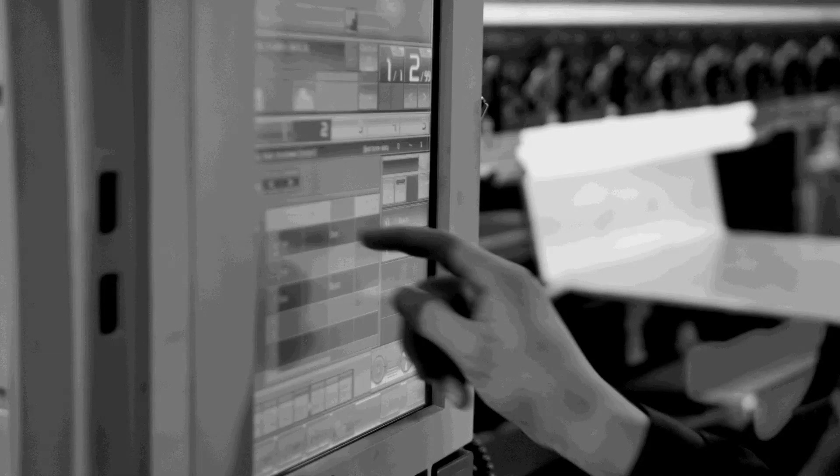The idea of this technical corner is to talk about Vericut. Now there's a system within Vericut called Reports. Could you walk us through what this actually does and how it helps engineers that use Vericut, Scott?

Sure. When the program leaves the CAD/CAM office, the operator needs to set the machine. They need information on this, and this needs to be in digital format these days. It needs to be traceable, and it's not just a list of tools. They may need to take dimensions off the part to set the stock in the vise sufficiently, or the clamps on the table. All these tools reside within Vericut to be able to do this.

If it's okay, I'm just going to start simulating through and we can get an idea and flavour of what I'm about to do.

While you do that, just to let you know this is a simulation, using a Makino machine, but it's not necessarily just about one Makino machine, is it? Completely neutral, the machine's really irrelevant. It's about what the information we're capturing from the simulation.

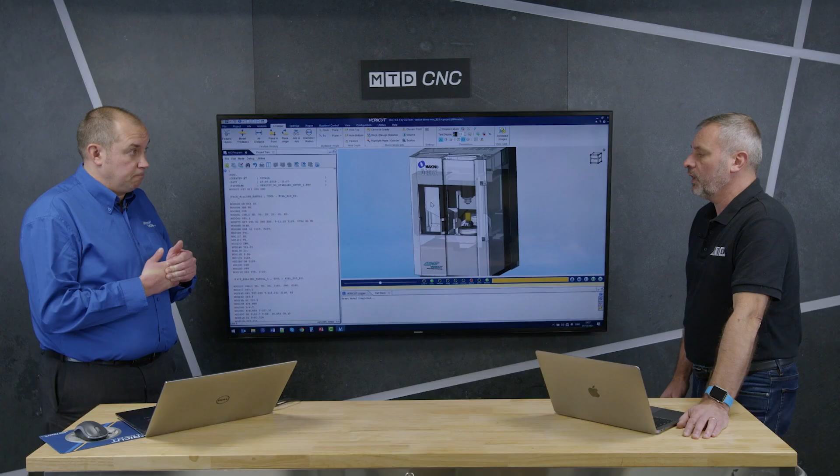Okay, Scott. So what you're going to see is I would just push play as I normally would do in Vericut. You're going to see what I've done there is taken a snapshot of the first setup. So it says setup 1 on the top right hand corner, and this is going to be embedded into our setup sheet or Vericut report.

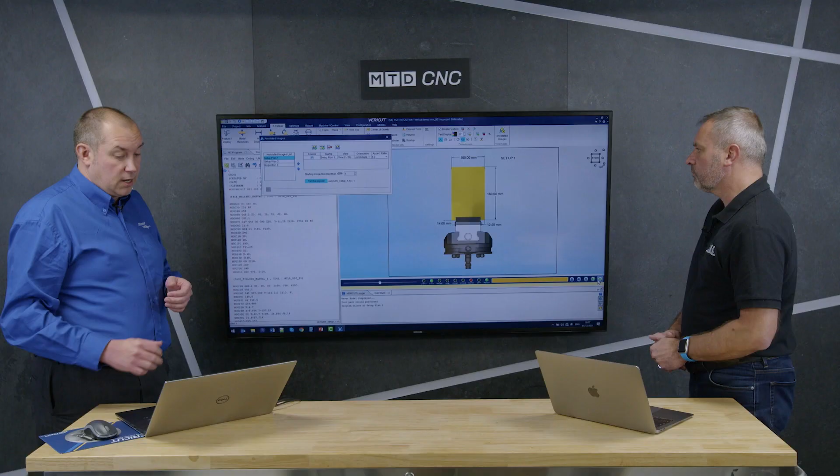Okay, so I'm just going to move through and we're going to simulate through. Now as I do this, I'm just going to talk about the benefits slightly. What we see with our prospects, and indeed some of our existing customers still, is that they're spending far too much time outside of the CAD/CAM system, or Vericut indeed, documenting setup sheets.

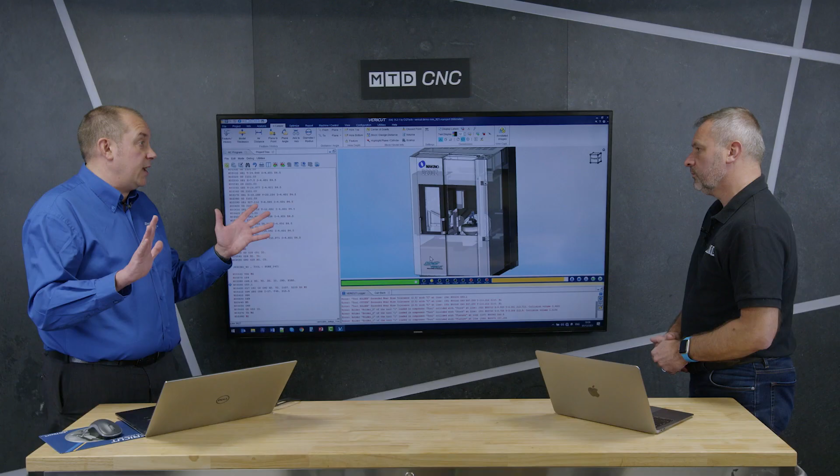There's no need to do that within Vericut. All the information is within here. All I'm going to do is use a general template to give you a feel of what we can do, but all the information resides in Vericut for you to be able to do this.

So this is very much to optimise the process, avoid collisions, making sure the tool paths are correct. The purpose of the report is to enable the operator to set the machine, not have to leave Vericut to go and do this as a separate document. It's all here for you.

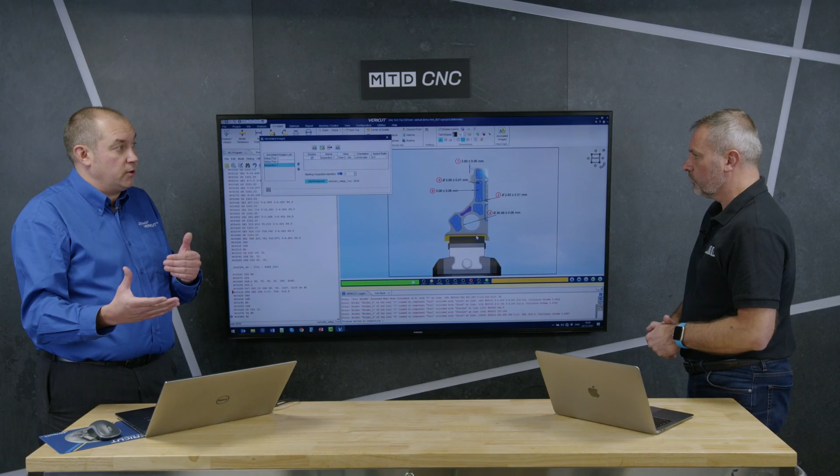So what you've seen here now is that the part's going to be turned over to setup 2, but we may want to check some critical dimensions on the component before we move it. Before we take the part out of the vise, we may want to check a few critical dimensions, make sure the part's sufficiently machined before we move over. This is the information you want to give to your operators.

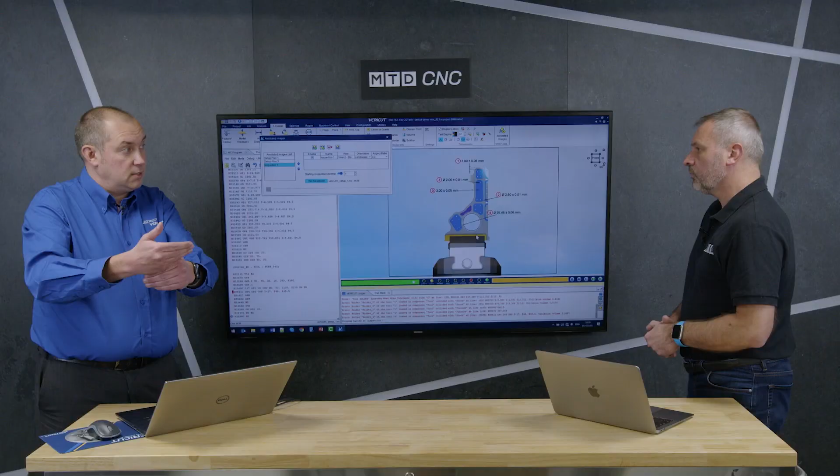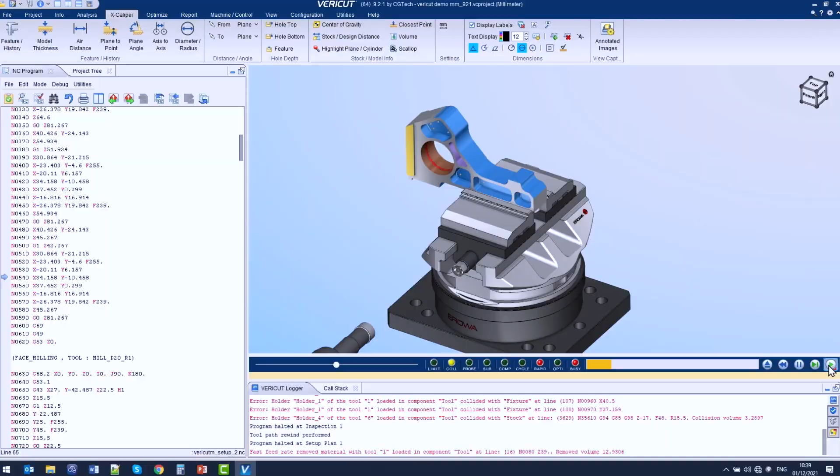Okay, so again, we're at the end of setup 1. I'm going to move through to setup 2 now, and I'll make another click. This is the information we need to go and set that part up for setup 2. Move forward again, we play through setup 2, and at the end of this it will all be captured into a document. So that's the inspection plan for setup 2.

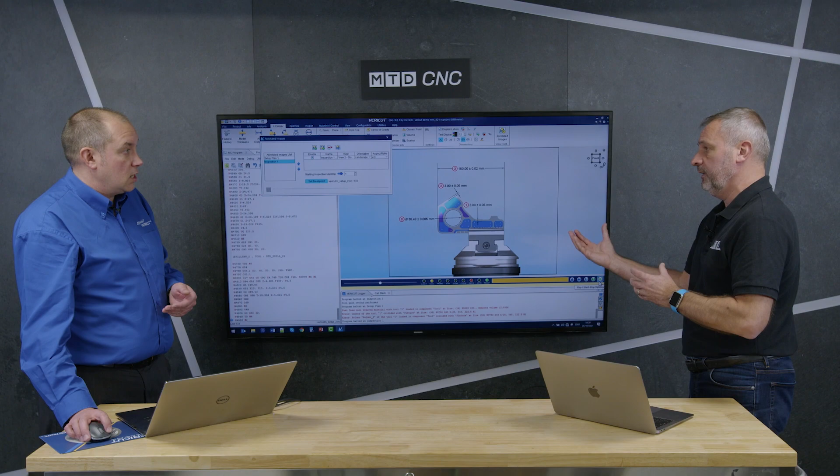And I suppose that, to a certain extent, if you're doing repeatable parts, it's all documented within Vericut, so it's the press of a button basically. And it's digital, yeah, it's to save people spending time. I went to a prospect recently who said they spend as much time programming a part as they do creating documentation, sometimes longer, which is just crazy. This is just a few clicks and we're done.

And I think a lot of companies that do use software like Vericut, you've got all the CAD/CAM side there as well. It's not just about the simulation, is it? No, it's about capturing our whole process in a digital format.

So now I've got that information done, I can generate the report. I just say save. This is in HTML format, it can also be in PDF format. I can put user tags in here, so I can put in the programmer's name, for example.

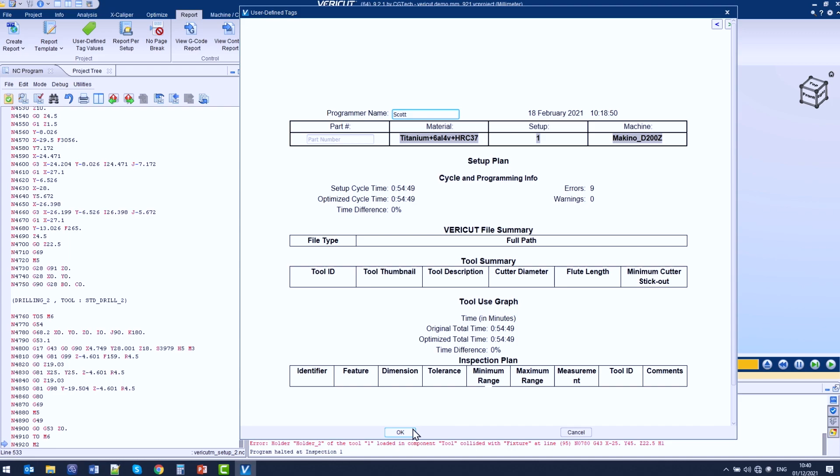Just say OK. And again, this is configurable to the company. You don't have to have our logo at the top, you can have your company logo at the top. But it's just to give you an idea. This is the first setup, that's how we want it in the vise, and a list of tools.

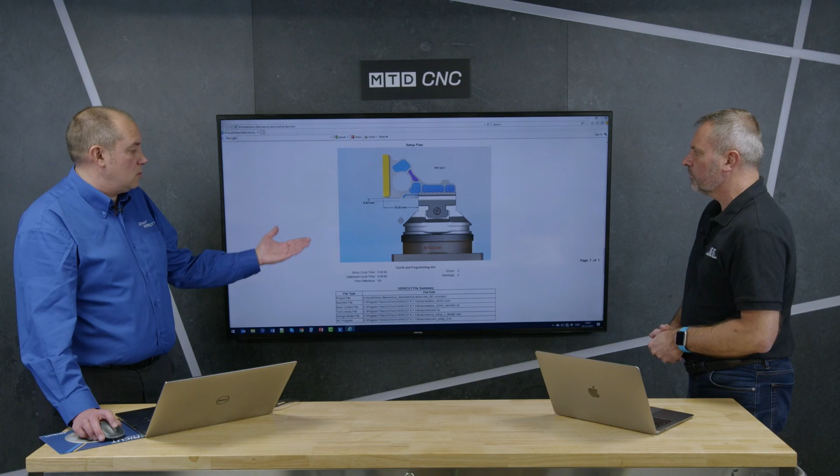An inspection plan. Then we move through to setup 2. Again, where do all my files live? What do I need? The tool summary, and again the inspection plan for setup 2. So all that information can be captured sufficiently so the operator doesn't need to disturb anyone. They can go and set the machine as they should be able to.

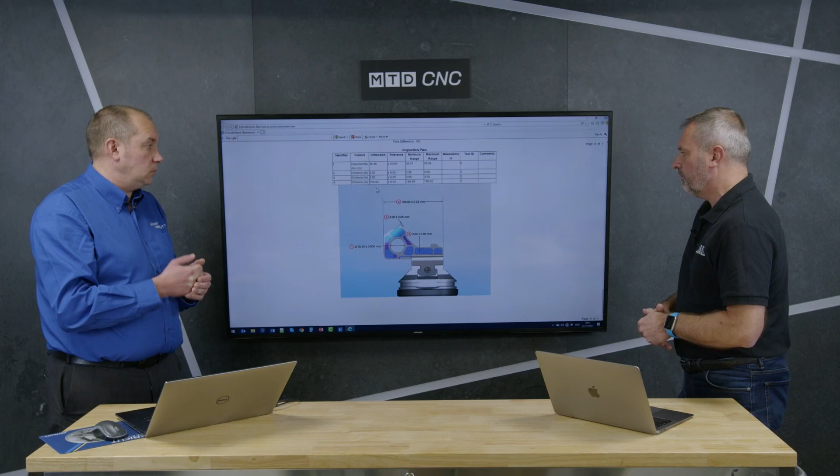And I suppose a lot of companies that may look at software packages that may not use Vericut, for instance, this is the reason why you should consider optimizing your machining process then, Scott.

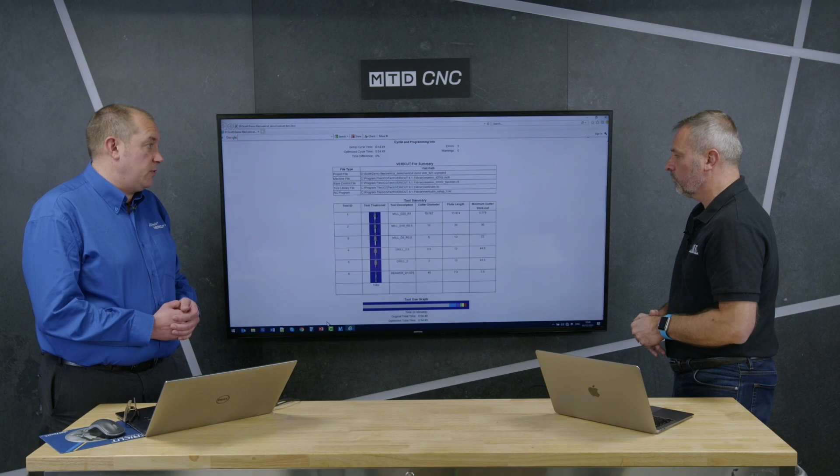You've verified the actual part, but if you want to make some changes on the tool, is that an option on Vericut as well? Well, the customer may want some more detail, some more information on the tool. They may want to know the minimum extension on the bottom of the tool, for example, which you can put into the report if you want to. But you can also annotate the tool and put this into a separate tooling sheet.

So within Tool Manager itself, this is a fairly new function in Vericut. We can now take a section through this tool if we want to. But firstly, what I'm going to do is annotate the tool. So we can see just from a single click, we get a full breakdown of the tool. So we can see the minimum reach here is 35mm, which is great.

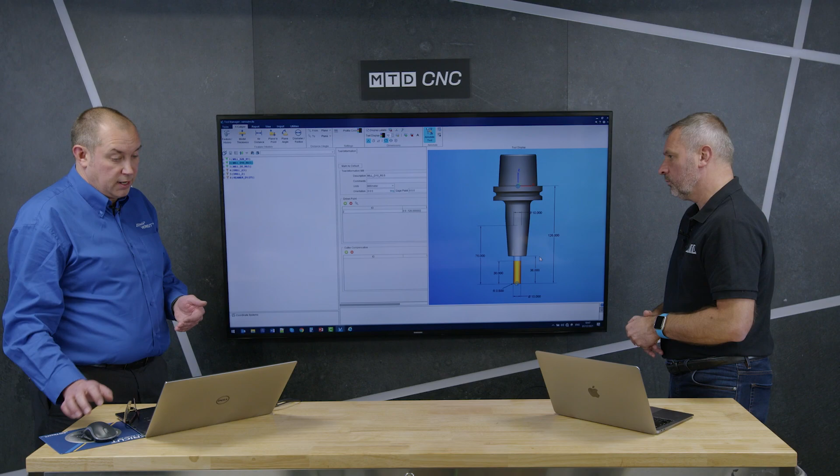But we want this in a digital format to give to somebody to be able to set this tool up sufficiently. To make that process slightly easier, we may want to take a section through the tool. So what I mean by that, Mark, is if I just take a section, just do an add through all components, and we can see that's a complete section through the tool.

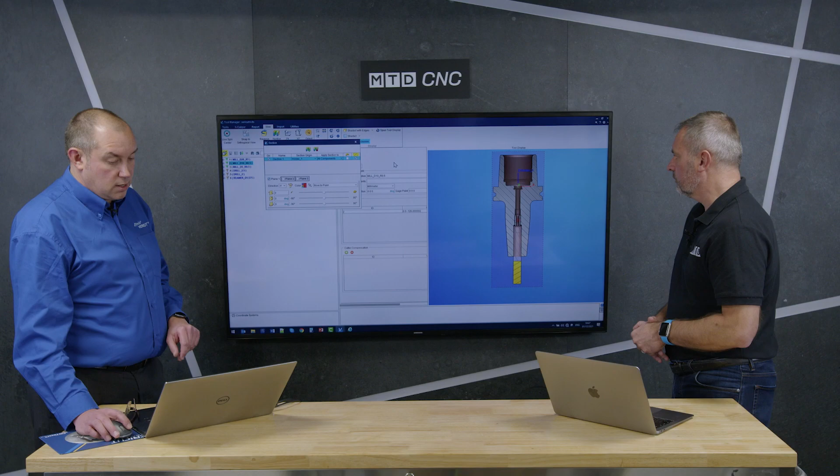And again, we come back here, we annotate so we can see exactly what's going where within that tool breakdown. And again, what we want to do now is be able to give that to someone in a digital format. So we just go to Reports, HTML, just do a save. And we get, again, the full breakdown of the tool.

So really the benefit to the customer is very much about not actually just setting the actual component correctly, but also the tool. Correct, yeah, that's really important.

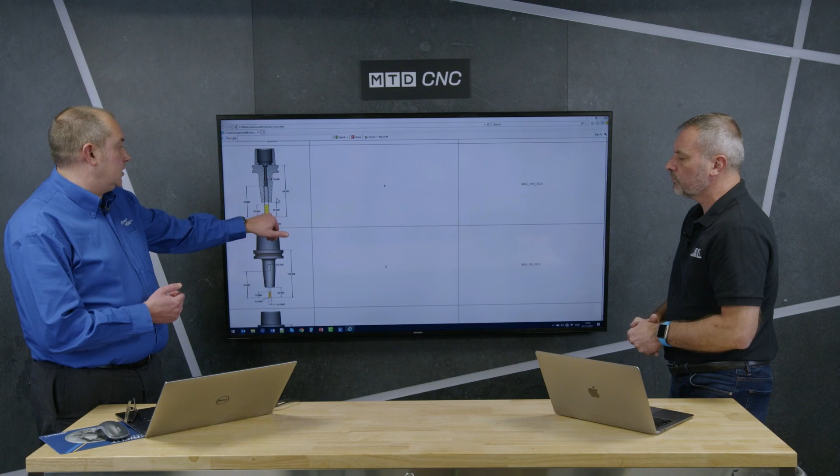And you can also put things like tolerances on here. So that tool's got to be 36mm, otherwise you're going to start colliding with the bottom of the holder. Well, it needs to say maybe minimum or plus, minus, or -0 plus 5mm, whatever that may be. And you can do all that. So really, you're really sort of giving to that customer so that the benefit of exactly what that tool needs to be set up by, the whole process, and therefore your end product's going to be exactly how you've programmed it.

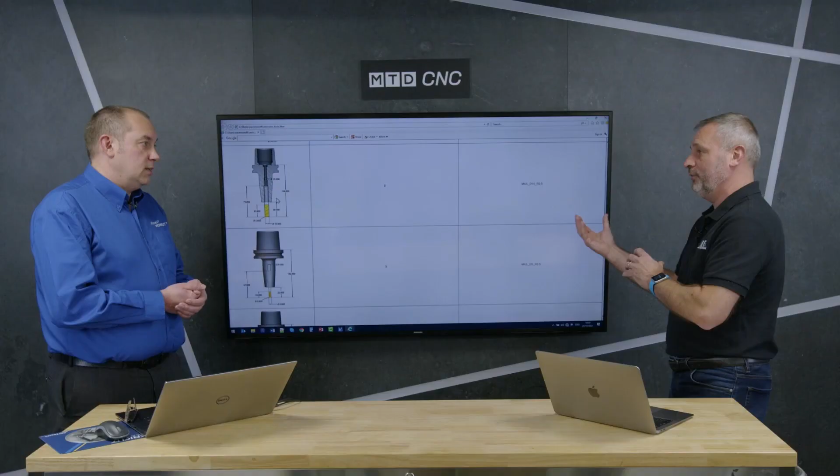Yeah, exactly that. And that's the whole point of Vericut. It's the right first time, every time. And quite often we have the argument, oh, but Vericut can't do this. Well, if you're using Vericut correctly and you're still colliding machines, then you're doing something wrong. The tools reside within Vericut to be able to go and set that machine as it resides in a digital world. So you get like for like. What exists in Vericut should exist on the machine, and you will have no issues whatsoever with collisions and prove out.

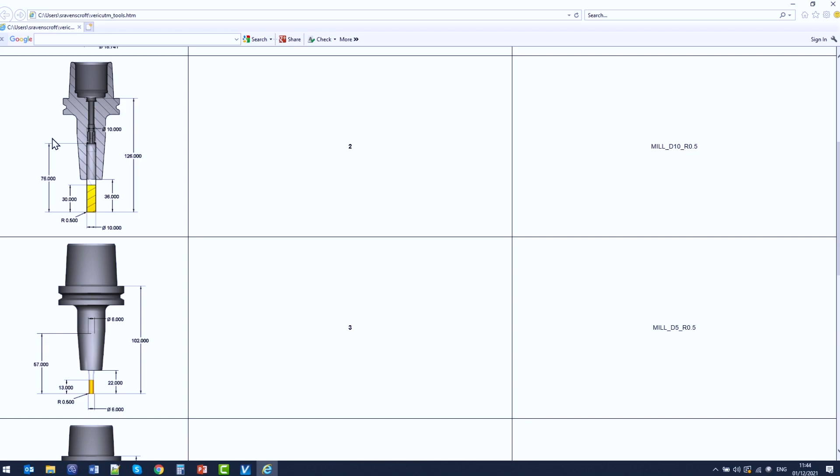And I think the whole purpose of having these tech tips is very much about making sure that you are utilising Vericut, but also, for those engineers that may not have Vericut but need this type of software, what would be your message to them, Scott?